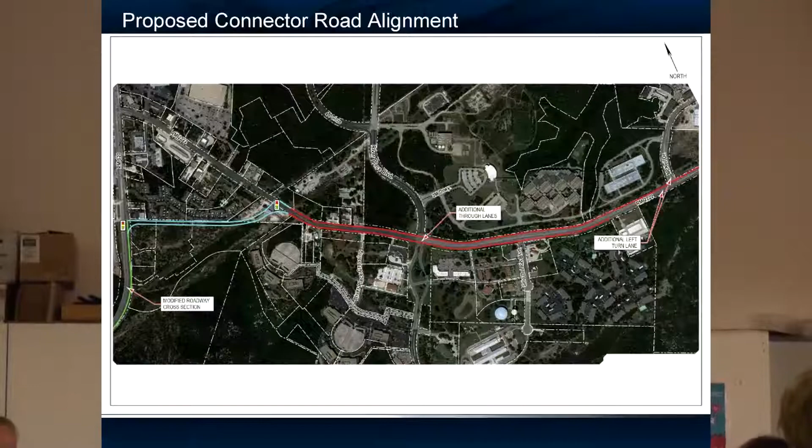The other bottleneck is River Place. A lot of that morning traffic from Cedar Park is doing a cut through. They're coming right over from 4 Points down to River Place, and they're creating another bottleneck right here.

We've looked at different options there. We've even thought about grade separating that, but we get into more funding issues doing that and more environmental concerns. So what we're saying is, if we can just add one lane in each direction through that signal, we're still going to have a little bit of congestion in the outer years, but we're going to be able to reduce that queuing of traffic and get more traffic through that signalized intersection.

Kind of like what we're doing in Cedar Park on 1431. We want added capacity, getting more traffic through those signals. So the concept is added capacity, one lane in each direction, from just past River Place all the way to McNeil before we hit Tumbleweed Hill.

Brian talked about a project that we have on the books right now. It's actually under design, and we're still seeking construction dollars. It's to add dual lefts right here at McNeil, and that's to get into Vandegrift School. We've been working pretty good with the City of Austin on that, and Pam with the Leander ISD.

So the idea is we can kill that added lane at that dual left, and then we don't really need that added capacity going down Tumbleweed Hill. Same with the opposite direction: we come up Tumbleweed Hill and just past Ribelin Ranch would pick up that extra lane. We carry it through all the signals, and it would go on up to just past River Place, where we would end that.

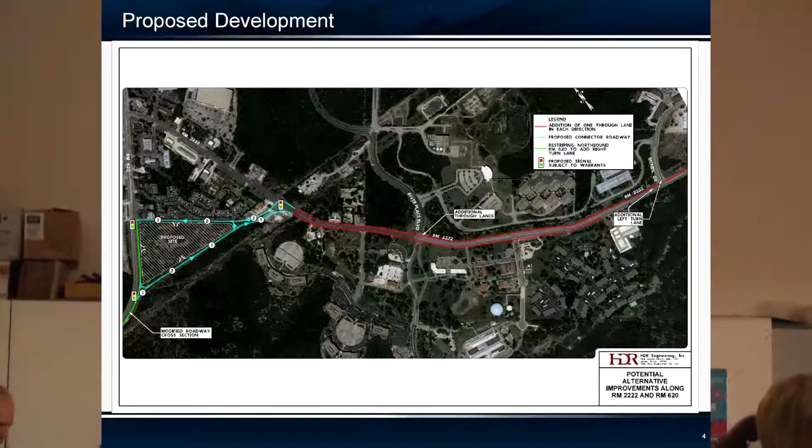But let's say in the afternoon you're going to Cedar Park or Bullick Hollow, you won't be stopped at this signal, you'll just continue going. That signal is only for left turning traffic trying to get to Steiner Ranch and Lakeway. If it's in the morning and you're coming from Cedar Park or Bullick Hollow, you could be stopped at that signal, allowing Steiner Ranch and Lakeway traffic to feed back out. People dropping their kids off and wanting to go back home will get a signalized red, allowing them to go back.

So this is a pretty cool concept. It's essentially the same concept as the other one. We haven't modeled this one yet, but we feel like it's going to offer the same benefits. We're getting ready to task HDR to go ahead and model that and make sure we're right in our assumptions. So let's go to the next slide.

So this gets a little more detailed here, but basically what I want to share with you is our baseline right here. This is AM up here on top and PM, and I apologize, you won't be able to read these numbers, so let me give you an overview of what they say.

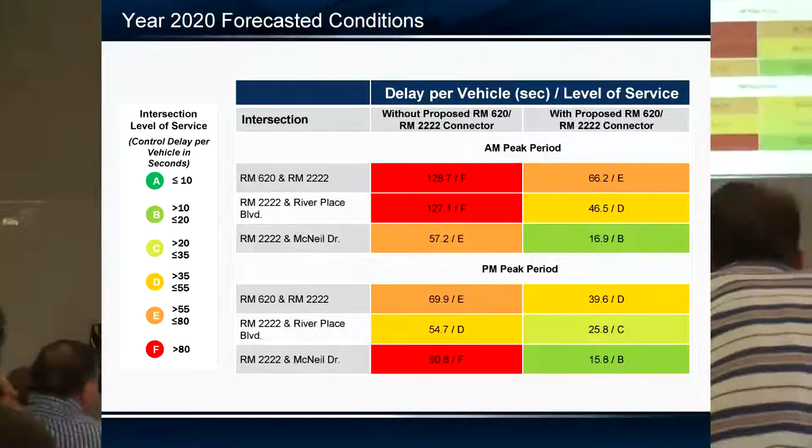So let's just look at AM right now. These are our major intersections: 620, 2222, 2222 at River Place, and 2222 at McNeil. This first column is if we do nothing, in year 2020, what is it going to look like? Red is bad, obviously.

The first set of numbers is our delay per vehicle. We also measure the congestion by what we call level of service, or LOS. To simplify that, we're giving a letter grade, traffic's moving relatively smooth with no congestion, down to F, which means it fails - it's gridlock.

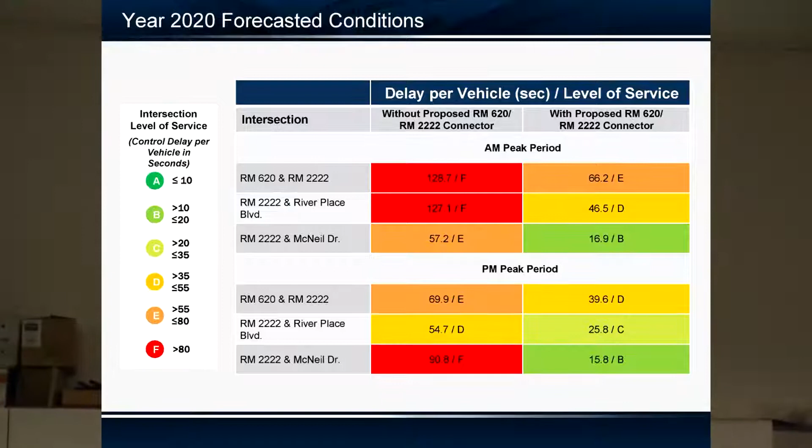All these are based off of two periods of time, peak AM and peak PM. As you can see, by year 2020, if we do nothing, we're at Fs and Es and Ds pretty much on all of our intersections in the morning and nighttime.

If we go with this proposed connector roadway, the first alternative we showed you that we have modeled - and I believe the second alternative will offer us the same benefits - we're going to see some improvements. We're not fixing it. The only way we can truly fix it is to put in grade separated interchanges, direct connects, and more added capacity on the facility.

But if we do just what I showed you earlier, we can have a drastic improvement and bring those levels of service from F to E, or F to D, getting a little bit more improvement out there. So let's go to the next slide.

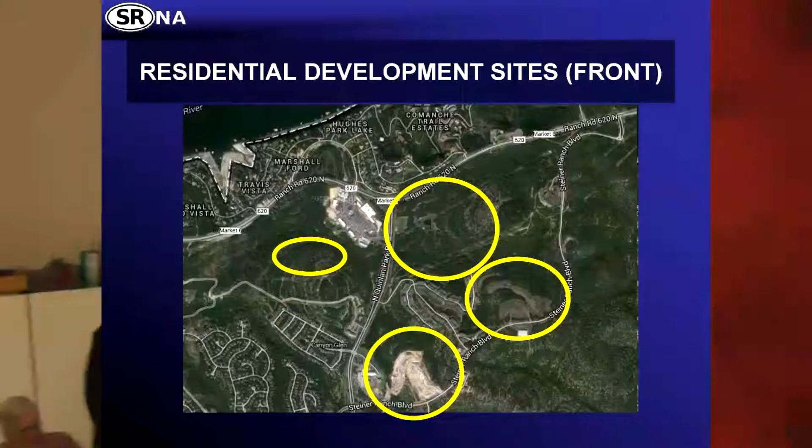I'm going to roll through here and give you a real quick update on development. That's feeding a lot of the traffic and crowding in our schools, so we've got some interesting proposals for you tonight. Just to preview what's coming up, we'll have an update from Pam Wagner and Jimmy Disler from LISD on access to Vandegrift, and a presentation on egress options here from Steiner Ranch if there was an evacuation, plus a lot of other good topics. I know it's getting late, but most of y'all can stick through this.

So these are all the areas shown that are going to be developed. This is the front of Steiner Ranch, that's Quinlan Park Road and 620. All the areas in yellow are being developed or plan to be developed, so pretty much the balance of what's left. Let me give you a quick run through.

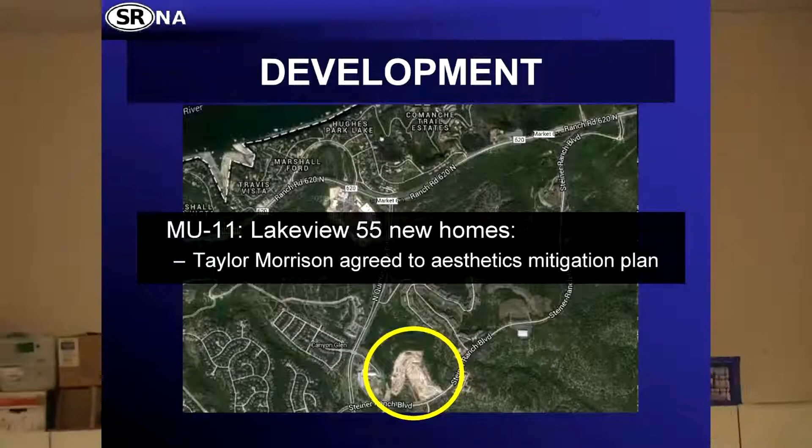MU11 is the homes going in from Taylor Morrison, and as you all know, that was kind of a scalping of the hill type of deal. We reached out to them and they were very receptive to doing something to mitigate the scalping look, the aesthetics, so they agreed to put in a bunch of big trees. You can see, I actually took this picture, a bunch of them went in last week. They're going to put additional trees beyond what they normally would, strategically placed so that in the long run those trees will fill out. When you look at the hill, you won't just see a mass of houses, you'll see some trees break it up. So that's kind of good, relatively speaking.

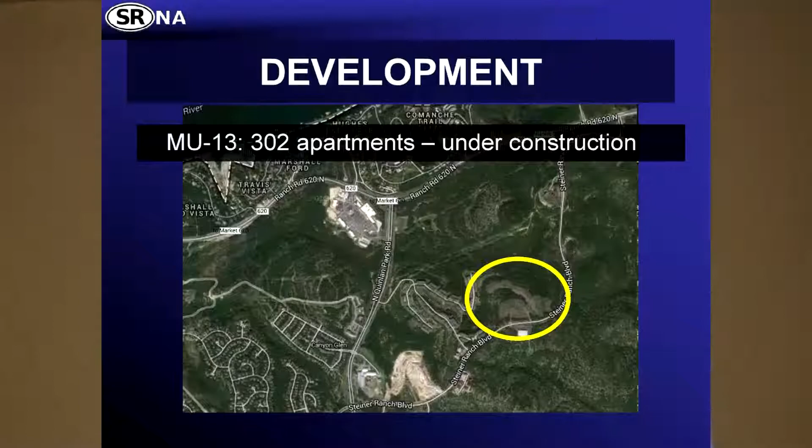Next I want to highlight apartments. This was one of the impetus for the Steiner Ranch Neighborhood Association being formed, that and fires, back at the end of 2011. The one circled here is called MU13, just over 300 apartments going in. That one was on the books since back then, it finally got a new developer, and they're moving forward with that. You've probably seen some more dirt moving over there, a lot of construction. So that's happening now. If you look at this map, the road going vertical, up and down, is Quinlan Park Road. Steiner Ranch Boulevard is the road heading off to the right and weaving up, and Steiner Steakhouse is up there on the right. Thank you.

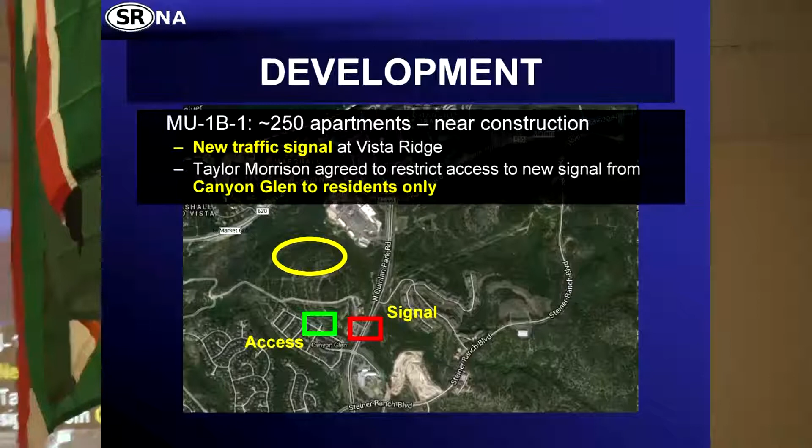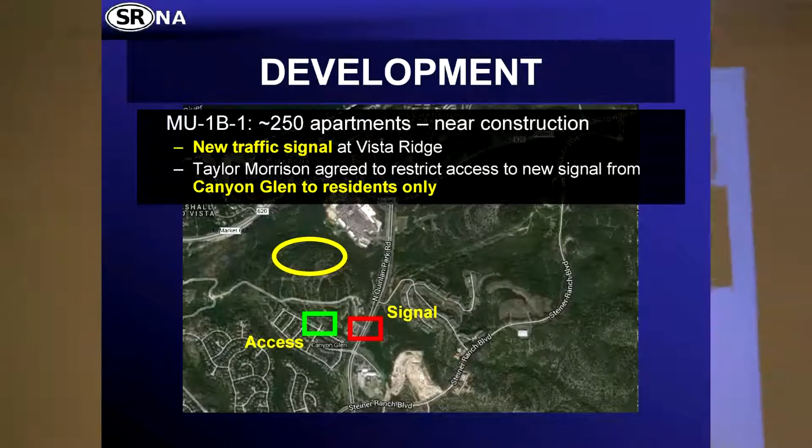Okay, next up, just to make it aware, is MU1B. This is the development behind Randall's, up on the hill. Here's 620, here's Randall's, here's Canyon Glen, here's that Vista Ridge shopping center right here, where the Welcome Center used to be. So this hill will have development on it. On the back side, it's divided into 3 sections by power lines, you can kind of see them in the tree lines here. On this back side, there's going to be more apartments, about 250 apartments going in.

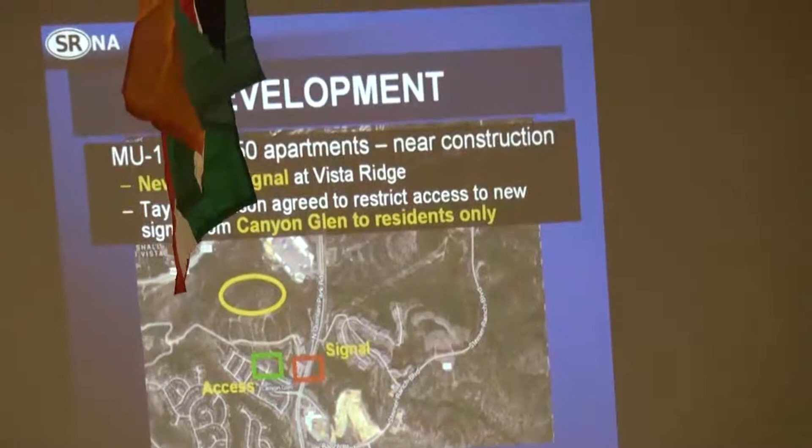For the folks in Canyon Glen, you've seen the road construction happening here already. Now the good news for them is the apartments aren't on this side of the hill, they're on the side of Randall's and 620. But what happened here is there's a road that's going to go all the way around the hill to provide access to the apartments. The initial proposal was that road would actually provide access for folks in the apartments to have a second exit, which was required for fire purposes to have 2 exits out.

But the concern, of course, was that folks would end up cutting through the neighborhood and causing a safety hazard. So the developer did agree that at this location where this access will take place, there's going to be electronic gates. Folks from Canyon Glen are going to get clickers, and they'll be able to use that road to access what will be a new signal at this shopping center. So the silver lining is folks in Canyon Glen will finally have a way to get out when it's time for school. But for everyone else, it'll be very important when that light gets implemented that it's timed and doesn't get in our way.

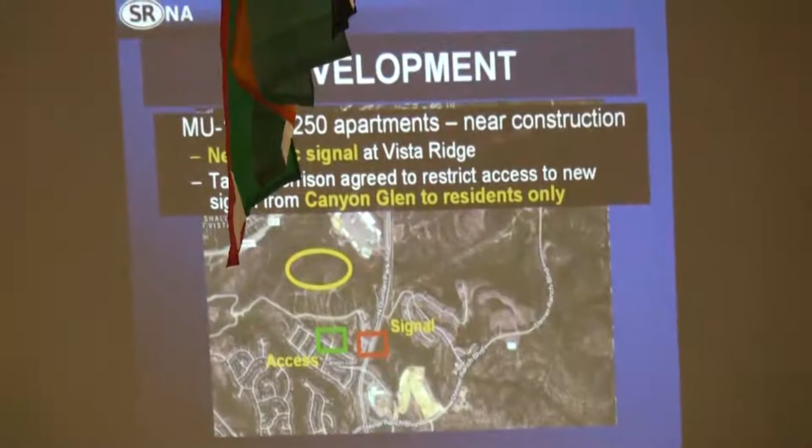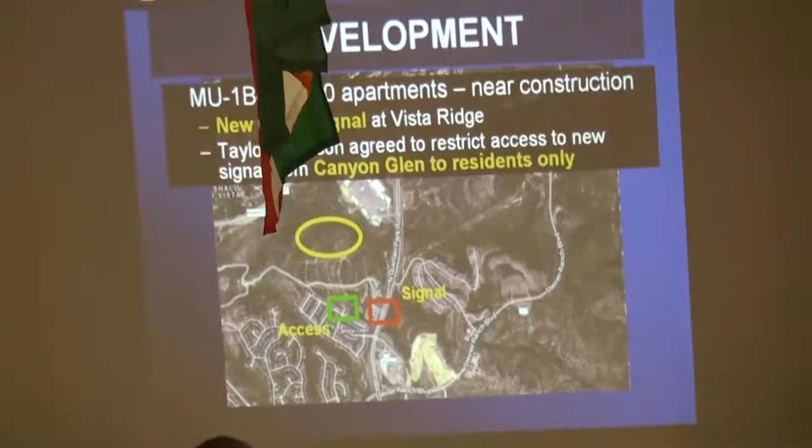How are they getting all these permits without making improvements to the roads or commitments to... This is a very good question. I should have probably addressed this up front.

The crux of all of this is, for folks here in Steiner Ranch, there was what's called the Steiner Ranch Development Agreement. If you go to our steinerranchna.org website, under development issues, you can actually look at that entire agreement, the dozens of pages that it is. And that agreement outlined what the City of Austin, who controls development in this area, allowed.

We're in the City of Austin ETJ, extraterritorial jurisdiction. And so the City of Austin actually made an agreement with the developers out here that allowed for a certain amount of development and ease of development with respect to approving each individual project. So they basically made an upfront bulk agreement that said you can build so many houses, so many square feet of commercial real estate, so much impervious cover.

And that happened now decades ago. So that's been on the books since way back then, way before we had traffic problems, way before we had these other sensitivities. It would have been nice to go back in time to influence that, put some checks and balances into the process so that not everything can get built without going through some kind of review, but that's just not what it is.

So legally, the city contracted with the developer to allow for all of this. And that's why, since we're not in the city limits, you see these projects happening and getting pushed through easily, because we really don't have any hooks or tentacles legally. The city doesn't, the county doesn't, have the ability to regulate that development unless it just obeys code. That's it. So, to answer your question, it's an important one.

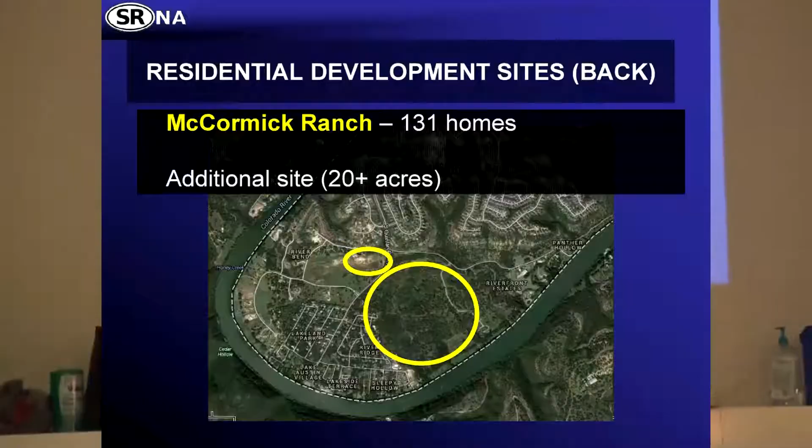This did get approved, so about 131 homes are coming in here to McCormick Ranch. There's an additional site around here that has some more room for homes as well, but not as big.

Now, the reason these are a concern, for a number of reasons. Number one, as you saw, pretty much all the real estate left over here is going to be turned into residences. So density is going up, traffic congestion is going up, school crowding is going up, and three-bedroom units are going to bring a lot more congestion.

But even beyond that, we do have some particular concerns. One in particular is that there's only going to be one exit from this property, and that exit will allow for a right turn only, headed towards 620. So you can imagine all the folks that move in there, looking forward to taking their kids to nice schools out here, and then they can't get their kids to school in the morning without going up to the light and doing a U-turn. And it's not too safe to do a U-turn with 70-mile-an-hour traffic going past.

And so you can just imagine the kind of maneuvers folks are going to have to go through, either cutting across, doing illegal things, or taking a nice tour in the morning with your kid, maybe getting some good one-on-one time.

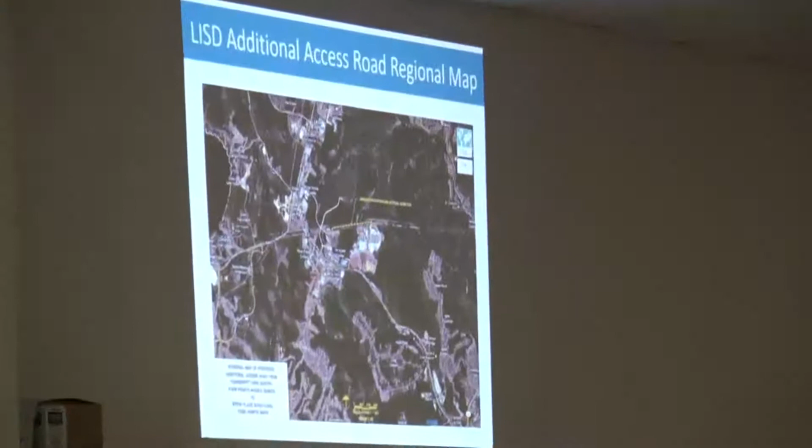But the most important thing that we're going for is the safety of our students as well as our workers and people just coming in and out of there.

That would take all of Vandegrift, 4 Points traffic coming out of Steiner Ranch, coming from Grandview Hills, and even if the Bullick Hollow people want to take the left, it would take all of that traffic straight through 2222 instead of going down 620 to turn left onto McNeil. It is an absolute vital, most important road.

It's the most important project we can work on. It is not just for our kids, although their safety is my utmost concern, but it's for all of us, and it will help the traffic around here.

So I'm going to let Jimmy, who is our Executive Director of Capital Improvements for Leander, which means he builds all of our schools, he puts in electricity, builds everything. I'll let him go ahead and explain exactly where we are in that process right now.

Thank you, Pam. Real quick, I've got about probably two hours worth of slides, so I probably won't take but a couple of minutes.

Those that don't know, I know it was mentioned earlier about the power line that goes down through here, why we didn't just build there. Actually, we've been discussing this over three years as far as access back there. And so the traffic committee and the district have been working real hard to try to get a road back here.

Partnering with 3M, we've got to have their cooperation as well. They've agreed to let us, if this road ever does get built, to actually go through the corner of their property also. If you'll move forward.

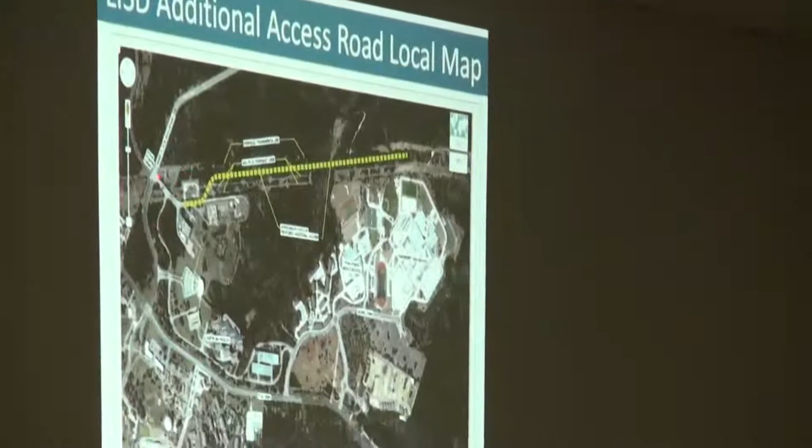The power lines run through there, and so we're just proposing to come off 4 Points of River Place, come in and come back in to access these campuses.

As Pam said, our primary goal is to get a secondary access. If you have any situation on the campus, we need that secondary access, and so that's one of our primary goals. As I mentioned, we've been working on this for a very long time, and we knew going into it, it was going to be a very slow process.

I mean, you do have the Balcones Canyonlands Preserve back here, which is basically controlled by Fish and Wildlife and the BCCP group. And so what we're doing is working with that, and we're actually submitting our own habitat conservation plan to Fish and Wildlife.

Our goal is by August 1st to be submitting a draft plan to them, which would actually start the negotiations and review by Fish and Wildlife of what has to be done for mitigation, etc., and what would be afforded in this area.

Of course, another thing that has made it more complicated is the listing of the salamanders and various things recently by Fish and Wildlife. So that's slowed the process also, but we are working diligently to come up with this secondary access. That's pretty much where we are.

I do want to echo what Pam and Brian have said. Representative Workman, Commissioner Todd, and Daugherty have been very instrumental working with us and pulling together TXDOT to look at all there. They know there's a problem out here and they're trying to help solve it. So make sure you do thank them.

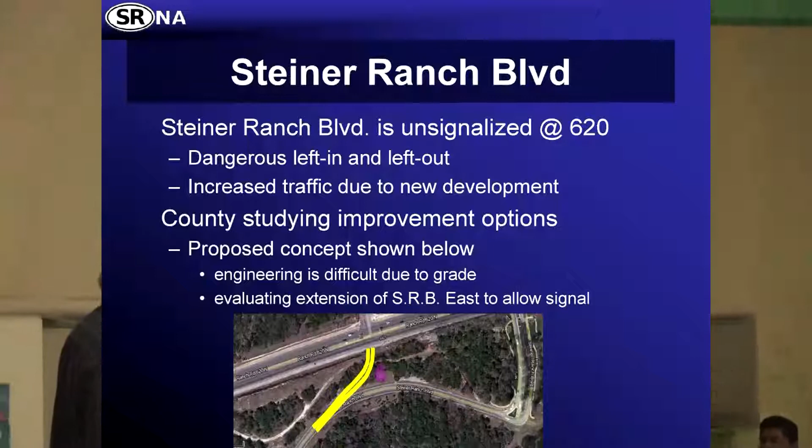As Steve said, when we met last summer we were pushing on this exact point, and we thought what we really would like to see is a way for the entire peninsula to evacuate, a second way out. The option Steve mentioned, coming through to Murphy Road, would clearly be emergency only, and we were not able to find a good cost-viable solution. I think he said $15 million and up for an emergency-only bridge, coming off maybe one of Steiner's boat ramps inside Caslano. That's kind of where it has to be, right? So it's not really a super awesome option for the bridge.

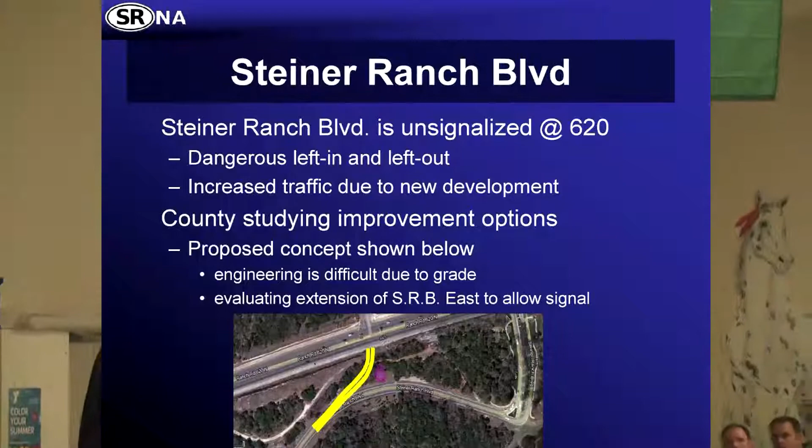One option was the pedestrian bridge, and in theory that could still work, but the question is does it really make sense to use a pedestrian bridge to evacuate 10,000 people? Is that really going to work? So I think where we ended up is that evacuation is principally going to be addressed by what Lake Travis Fire Rescue is about to tell us in a few minutes. But there is this option for incremental enhancement of ways out, either on Little Park Crossing Road as Steve described, or the everyday safety issue of Steiner Ranch Boulevard and how it connects to 620.

So quick question about the Steiner Ranch expansion tie-in. You were talking about the developers using the pre-approved plans from way back when, whatever it is they want. That was always included in tie-in financing when the development was originally done. Is that not the least challenge that existed?

Steve, from what I understood, you would actually have to open up your BCCP permit to implement that option. Is that your main roadblock? Yeah, there is an issue with the BCCP — if we were to try to build a road through it, that would open up our whole program to revision, which allows people to come in and weigh in and challenge, thinking back to where it first began 20 years ago.

Wasn't that in the original plan? That's what I was told, that the tie-in Steiner Ranch Boulevard Connection Trail was in the original plan. It was done in the BCCP, so it's part of the BCCP plan now. I don't know — I know some of the roads out here, like Holy Hollow for example, are also in it, but there is a very defined narrow corridor. So you have to open that corridor back up if you want to put something different in than what's currently there.

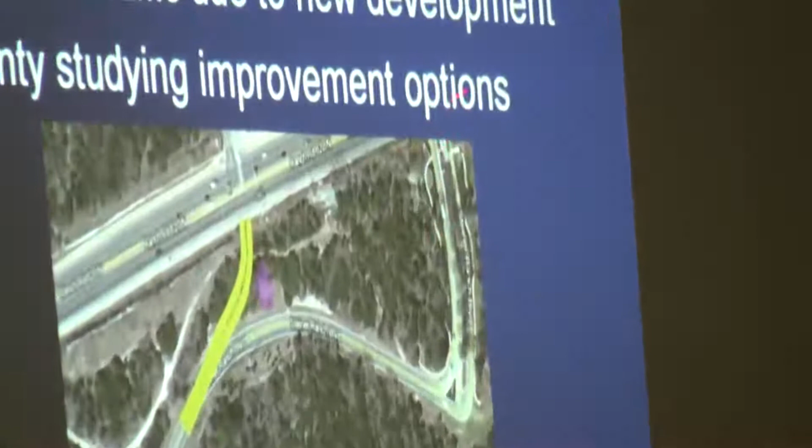So what Steve was saying is that they're going to try to push this back. Right now there's a light here, so this is too close to put another light at the existing Steiner Ranch intersection. Sorry, the chart doesn't go far enough. But what Steve was saying is they could theoretically push this back out far enough so you have a safe light out here that you can take a left out, take a left in. Whereas today this doesn't serve that function.

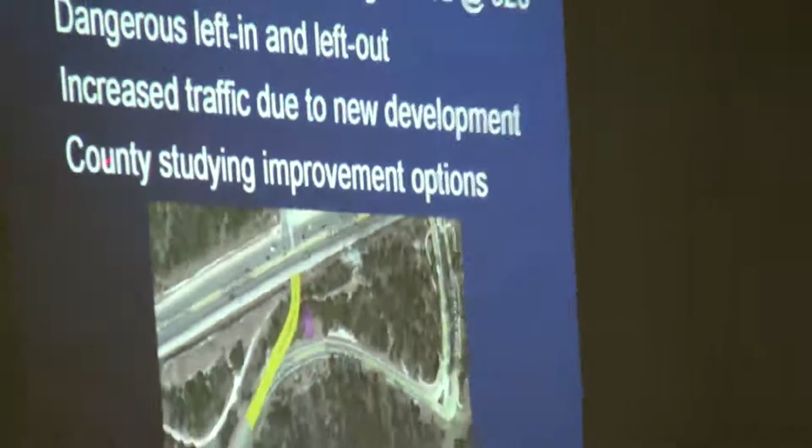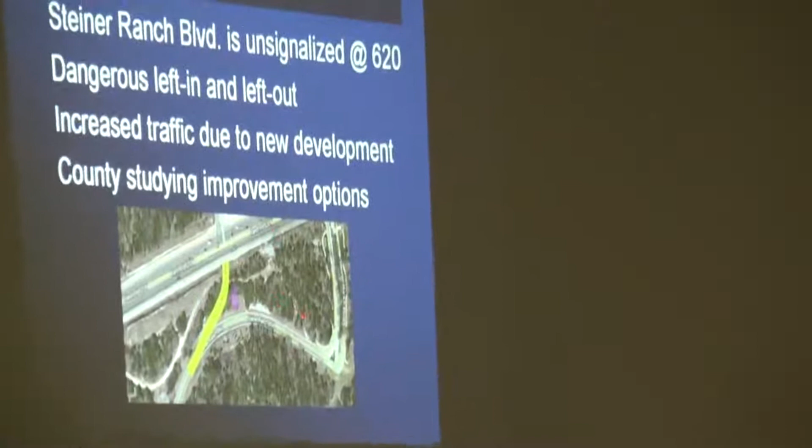One of the issues is not only the danger, which is the primary issue, but the fact that we've got the new development coming in along Steiner Ranch Boulevard means there's probably going to be increased pressure out on this intersection. Now, one nice thing that could happen is if we could do a right out over here under that brand new lane that TxDOT proposed, and still have signaling to allow for a left out, that could be a nice dovetail of the two proposals.

So, sorry, what do you say to a straw poll? I'm losing my voice quick, so I do want to try to get a straw poll. If you'd prefer the money be spent on the emergency access road, and those who want to see the reconstruction of Steiner Ranch 620 instead.

All right, thank you. We do go through our budget process annually. They don't normally fund large projects in their annual budget. We typically save the big projects for a bond referendum. The next one we're anticipating is in the 2017 timeframe. We had one in 2011, and we're cash flowing over 7 years to spend that now. If you have questions, you can call me or get a hold of Brian, and he'll get a hold of me. Thanks very much.